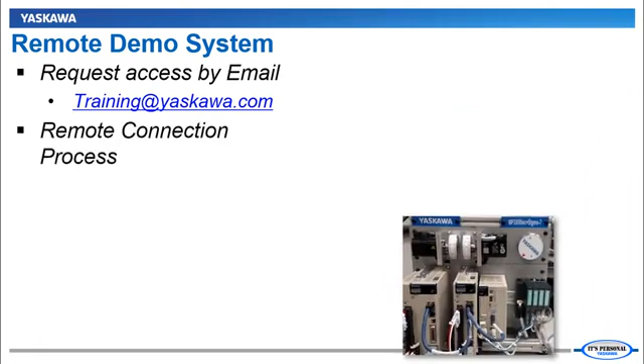You can see how this works in the remote connection e-learning video. Another document you'll want to refer to is the quick reference guide for the MPiec series controllers.

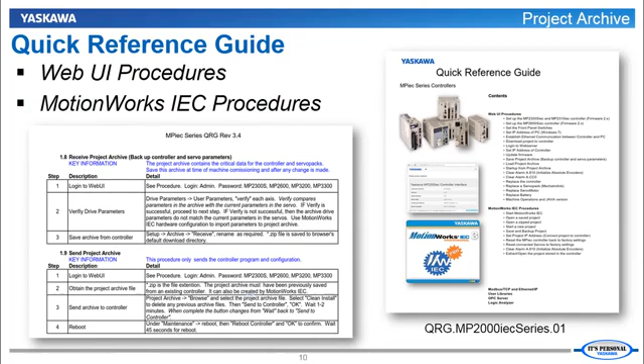The first section here lists detailed step-by-step procedures for using the Web UI. We'll be focusing on section 1.8 and beyond for receiving the project archive, sending the project archive, and starting up.

The demo you're connected to is currently a working control system, but we can't be exactly sure what's running on it. So if you haven't already, please log in. I recommend you use the Chrome browser for this training.

You log in as admin with capital A, password MP3300 all caps, and navigate with me under the Setup menu to Archive. And here you can see the files stored in the controller's flash memory.

These are all the files the controller uses to run, including the ladder logic, user units, cam tables, variables, and servo parameters. There may be a copy of the source code which it does not use to run. It's just up to the programmer to include it here or not.

Any data that is unique to the particular controller is not part of the archive, but instead is stored in SRAM, and this includes the IP address, the date, the time, the alarm history, absolute encoder offsets, and the current value of each variable within the controller's program.

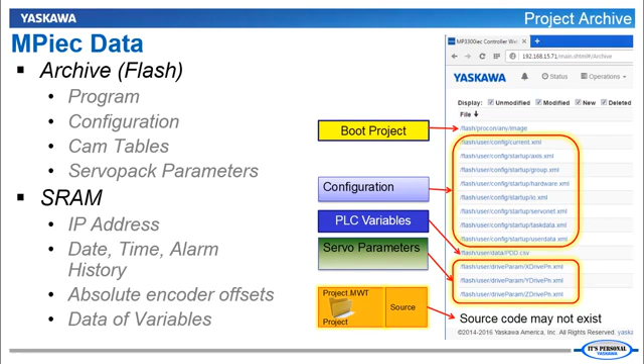First, let's back up the contents of this controller and receive these files as an archive. This is section 1.8 of the quick reference guide, and we're already on step 3.

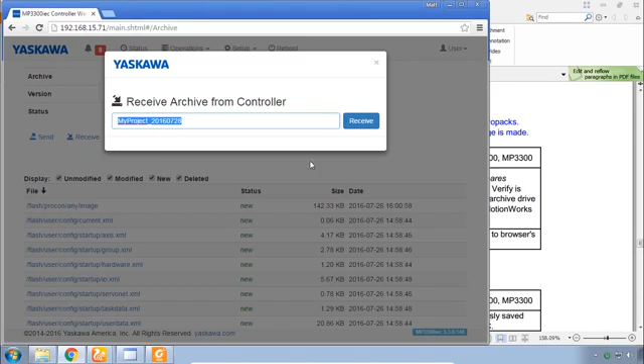At the top of the archive page, you simply click receive, and again receive, and the file will be saved to your PC just like any download in your browser. You could navigate to your downloads, and you'd find the zip file or different zip files that you've created.

In a real machine, you'll want to hang on to this file and save it to the network directory or with whatever system that you have in place for backing up the data on your machine.

I previously backed up a demo system like this one using the archive feature just like this, and it's part of your class materials called Archive Web UI. The controller was working perfectly when this archive was created.

So our task now is to completely restore the demo system using only this archive and the Web UI. The control system consists of 3 main components: the controller, the servo amplifiers or drives, and the servo motors. And so the restoration will be completed in 3 steps with a system reboot between each step.

We'll send the archive to the controller. We'll write the parameters from the archive into the servo amplifier, and we'll reset the encoder and set multi-turn limit to the encoder from the amplifier. And we have detailed click-by-click instructions in section 1.10 of the quick reference guide.

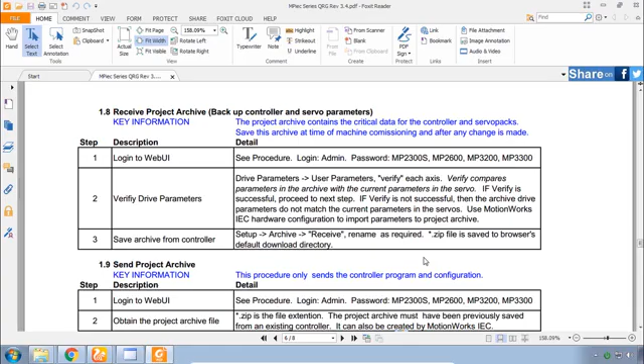The controller hardware is already set up. We have a quick start video on that. Motion is stopped. We're logged into the Web UI, and we have obtained the project archive file. So we're now ready for step 5, send the archive to the controller.

Okay, let's check that remote I/O. Everything's connected. I think I'll throw that over to the right-hand side instead. And we have the archive page up under the setup menu, archive, if you need that again. You probably already see it. It's the send to controller button.

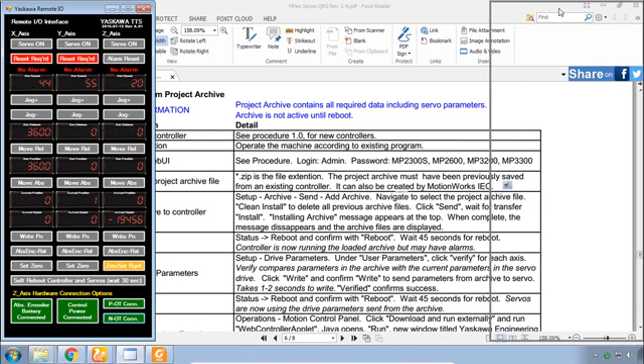You then need to add archive. Now navigate to wherever you have saved the class materials folder and find that archive_webui. That's part of the class materials. You open it. Now, do you do clean install or add replace only?

That really depends on the scenario. If you're starting out a system and you want to get rid of all previous data, then of course you do clean install. But if you want to save any recipes or CSV files, CAM tables, and this is just an update to an existing controller program, then you could do add replace only.

We're starting from scratch, so we'll do clean install and send and install. You can see here it confirms we're installing archive. And after a few seconds, that display goes away and you'll see all of the files appear.

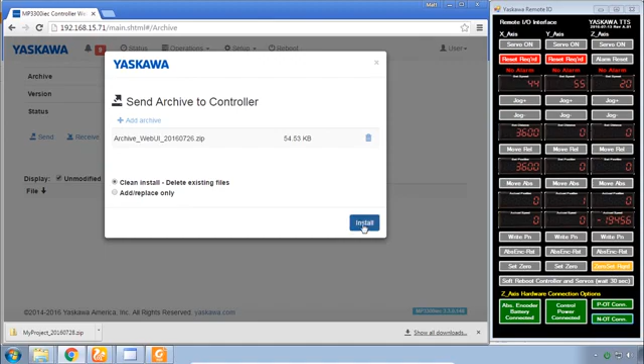So that is sending the archive to the controller and installing it. And the next step here is number 6, to reboot. That's up here at the top, reboot, and again confirm to reboot.

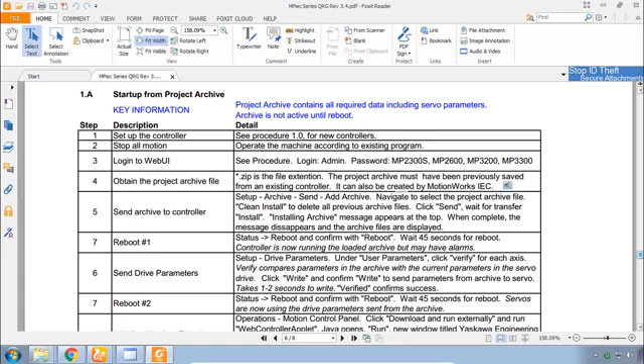We can keep our eye on that reboot here through the web camera. Looking here at the controller. Right now the lights are off, it's rebooting.

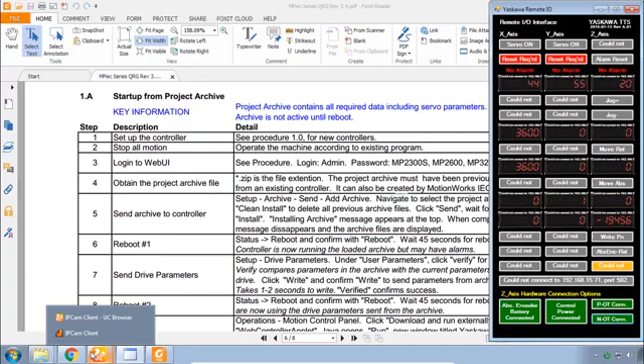And there we go, we got it ready and running. So the reboot has completed.

See, I do have an alarm on the servo. Don't worry about that yet.

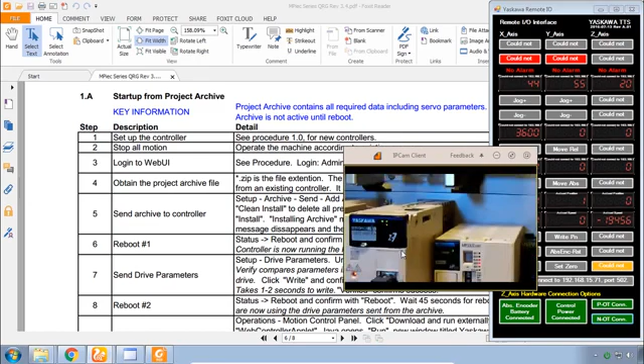Step number 7 is to send the drive parameters, so let's go through that. Up to the setup menu, you have drive parameters. And on the left, you can compare to or set the factory default parameters.

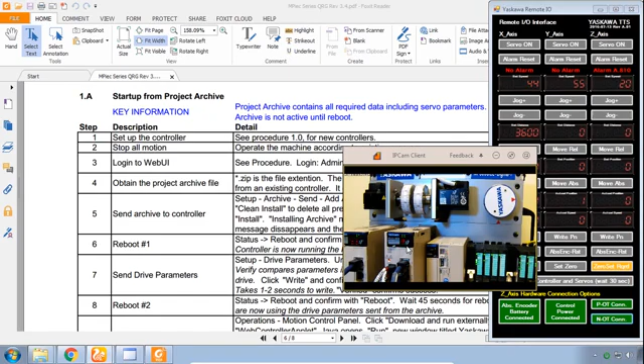You don't generally want those unless you suspect a problem with the amplifier parameters. You normally want to verify with the user parameters, which are part of the project archive that we just sent. You could verify whether or not you really need to send them by clicking verify.

And if there is a mismatch, it'll tell you what it is. It looks like there are a couple, so let's write all the user parameters. And when completed, you see that they've all verified.

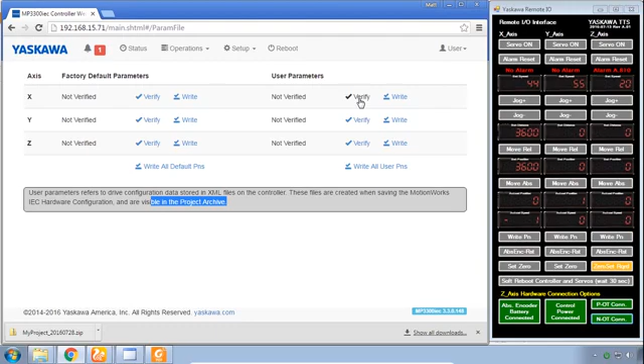The drives are good now. We just need to reboot.

You'll do a lot of reboots when you're setting up a system. Reboot and again reboot. Look at that camera. You'll be able to tell the drives reboot because they turn off just for a second.

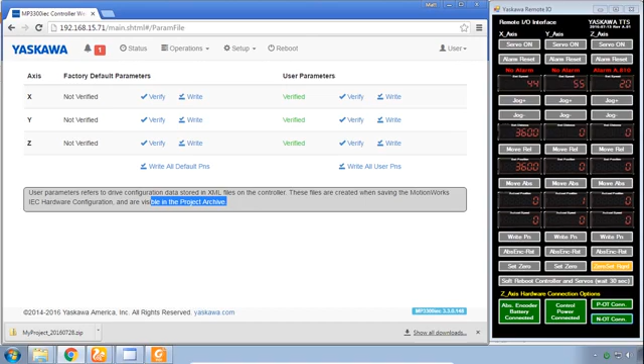There, they blink off right there. That's the controller rebooting the drives.

The servos now have the parameters, and the reboot of all the amplifiers has been completed. So it's time to move on to the motors.

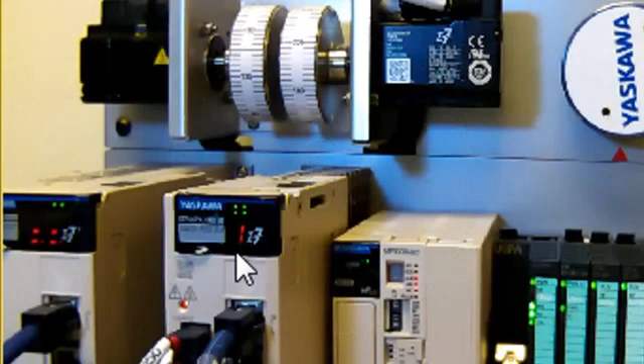There's this alarm here, A810, on the amplifier. You can look at that alarm under the alarms page. The problem is alarm A810, encoder backup error.

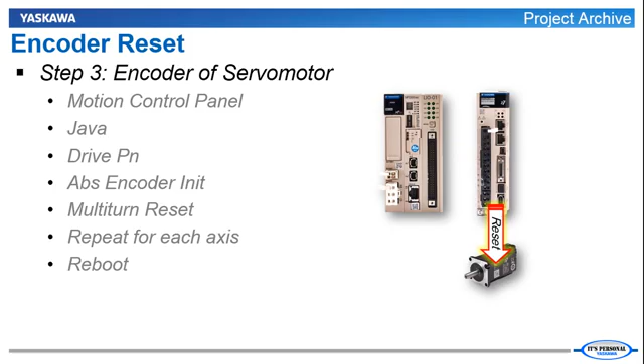All power supplies to the encoder have failed. This is because we removed the control power here with this hardware connection option of the Z-axis, and also disconnected the battery. If the battery is disconnected from the absolute encoder when the power's off, the absolute encoder can't remember the position and gives us an alarm.

So the next phase is to show how to recover from that. This is the condition you'll have if you ever lose this motor cable connection to the encoder, such as when you're setting up for the first time.

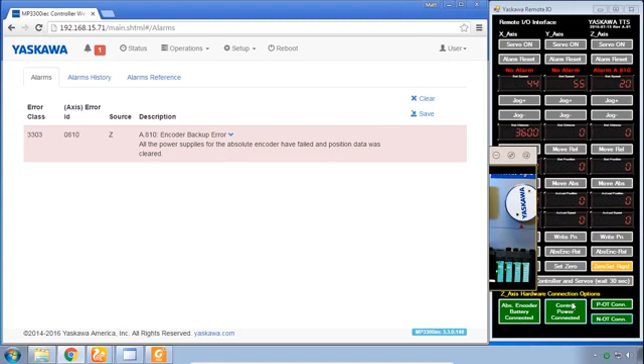This is step 9 of the quick reference guide, and it involves this motion control panel and a Java applet. This part seems to work best at this point in the Chrome browser. You'll go to Operations, Motion Control Panel.

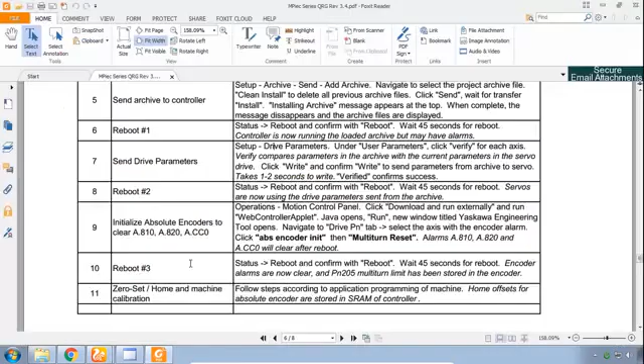You must have Java installed on your machine. If you're wondering about that, what I do is type Java in the Start menu. And if you get some of these programs, then you're likely to have Java. You can follow the link to install it if you don't have it.

Otherwise, what you'll normally do on this screen is click Download and Run Externally.

We'll keep the file and launch this web controller applet. You see this applet runs in a separate window. A little too big for my screen here.

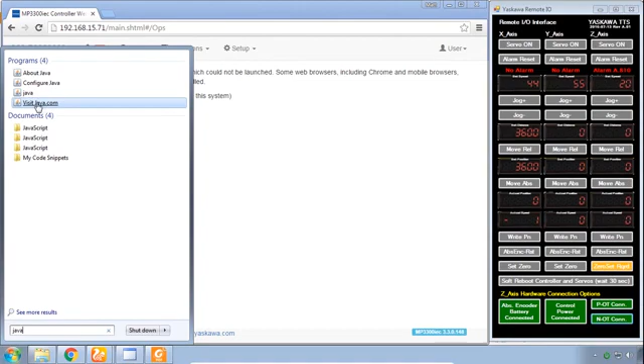Let me fix that. Once you have this window up, you need to clear this alarm, encoder backup error, by going down to the Drive PN tab.

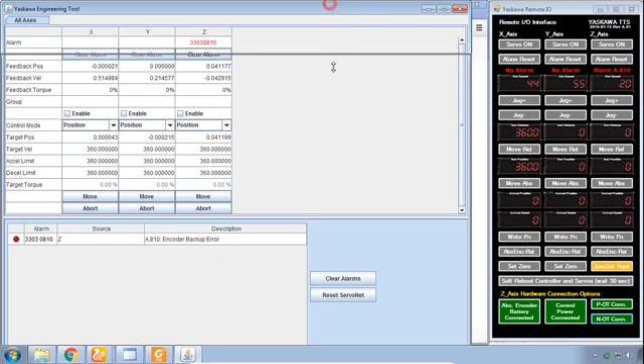Select the axis that has the alarm in the pull-down here. That's the Z axis for me. Click ABS encoder init and OK. You notice the alarm is not gone.

I do recommend, as long as you're in here, you might as well also do multi-turn reset. This will clear alarm ACC0 if you're using multi-turn in the encoder. Doesn't hurt to do it.

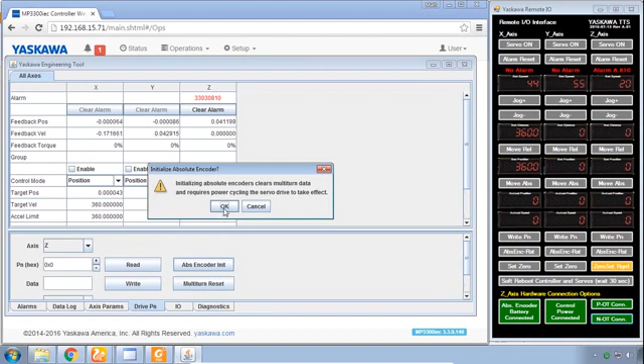Let's click OK. Again, you're not going to get this alarm to clear by hitting clear alarm or just clicking these buttons. You do have to reboot the amplifier. So we can close this engineering tool.

It doesn't survive reboots very well at this point. Go to status and then reboot, as many times before.

You can pull up that camera to see those drives reboot. The controller is rebooting. There's the reboot. And we're back online with no alarms, no more encoder alarm A810.

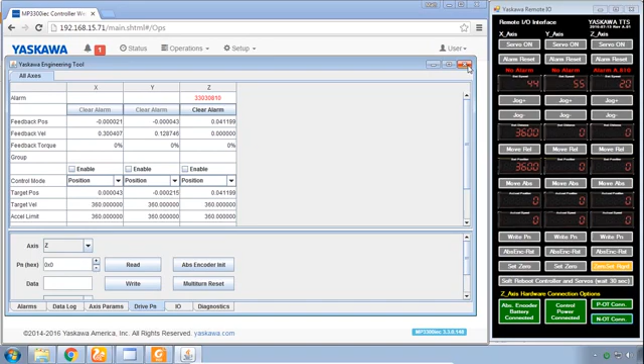So I'm going to suggest that as part of this tutorial you go through this again on your own and see if you can restore the controller and clear that alarm A810.

You might even want to mess this up again by disconnecting some of the hardware. And you see there are some variables here under status that indicate the value of some variables in the program.

In the certification test for this training, we'll have you look at these PLC variables as the answers to some of the questions, in order to tell whether or not you were successful in installing the project archive. That's part of the certification test.

So go ahead and disconnect that absolute encoder battery, disconnect control power. See there, that amp turned off. We lost communication to the other drive. Turn it back on, and don't worry about the top part of the interface yet. See if you can recover from this.